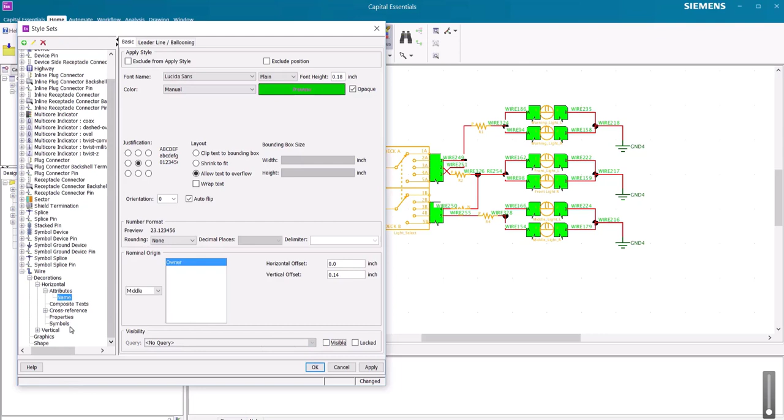We can do this via the Style Sets command dialog. And that will allow us to update the look and feel of our diagrams without changing any of the connectivity or needing to recreate anything. First, we will disable the names of our wires that are currently just cluttering up our design. We'll also set the colors of our wires back to default. We'll make our devices black, and then we'll set our connectors to a custom color.

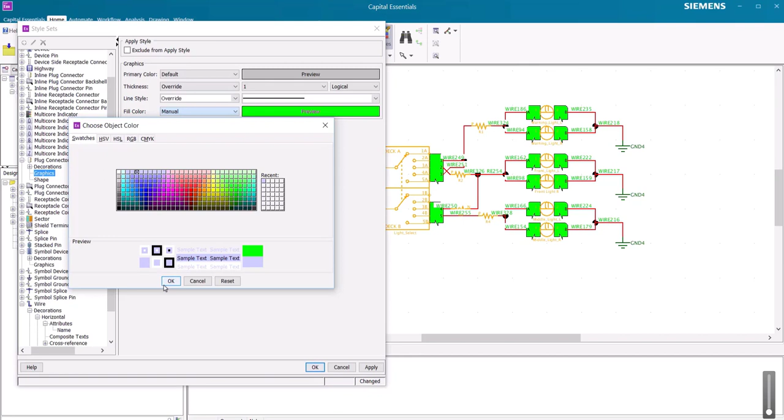Once we are satisfied with our selections, we can then apply the style sets across the diagram, all in one go. Making things a little easier on our eyes, that's for sure. Next, we'll create the circuitry for our new brake light system. Since it's similar to the other lights in our system we already have pre-configured here, we'll go ahead and just reuse this data to speed up the design process.

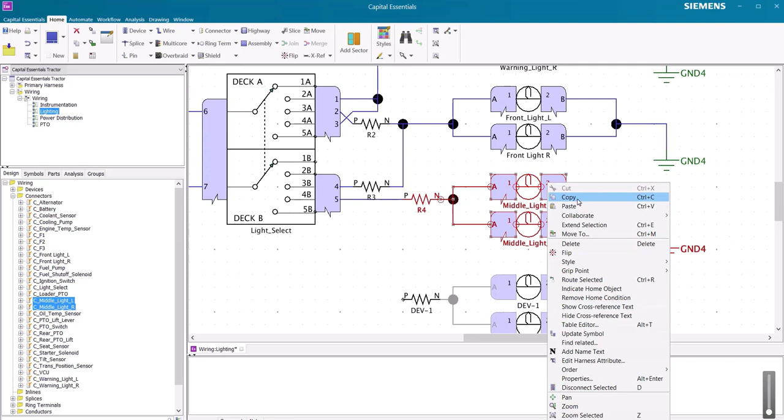By copying elements, we bring over the library part assignments, as well as any properties that may have been assigned. Again, saving us valuable design time. Now all we need to do is add another additional switch as our brake lights are independent of the light select.

We'll go ahead and add a few wires to connect the switch to the system. And then next we'll want to go ahead and rename our devices and connectors by giving them more meaningful names. We'll go ahead and start with the resistor, and we'll call this R5. We'll also update its value, which comes into play when running the analysis.

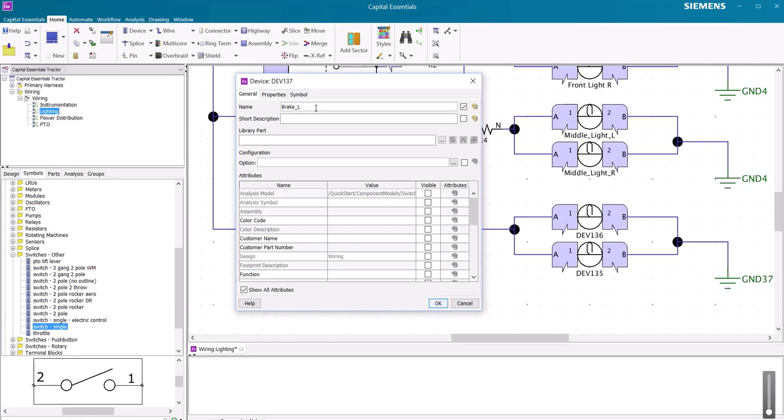For our switch, we'll call it brake light switch. And we'll also assign a library part. By doing this, we can utilize some automation to generate the appropriate harness connectors for this device. So now that that part is assigned, we can then use the generate harness connectors command to automatically create the appropriate connections.

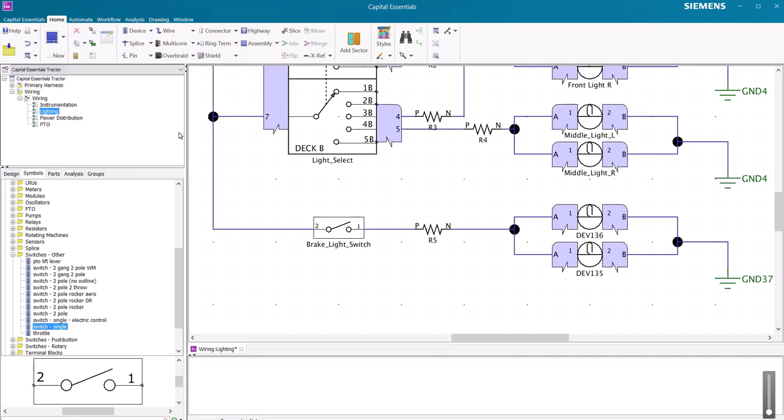If we go back and look at this in our library part assignment really quick, we can see that there's an additional part number assigned for its connectors. So by running the generate harness connectors, not only did the connectors get generated on the diagram, but the appropriate library part was automatically assigned. This helps cut down on the human error and speed up the design process.

While we're at it, we'll go ahead and rename the connectors, making them a little easier to pass over to the harness. And next, we'll update the names of our left and right brake lights. As you can see, we can do that right here in the graphical window without going to the properties, as well as our connectors.

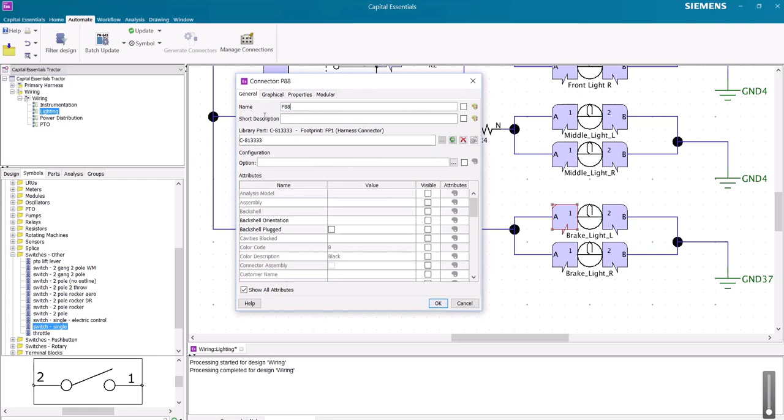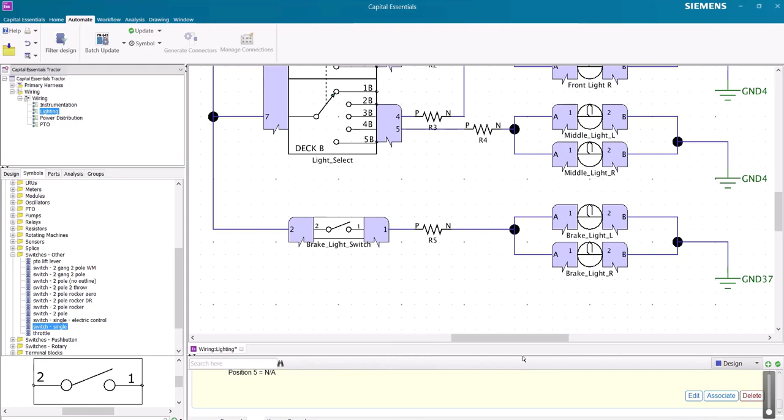Forgive my spelling. And for position 4, our front and middle lights should be powered. And then for position 5, we'll just leave this N/A for now. We can then associate all the relative objects to this note, so it's easier to locate in the design. Now we can select the lights controlled by the light select switch, the light select switch itself, and the diagram that it's associated to.

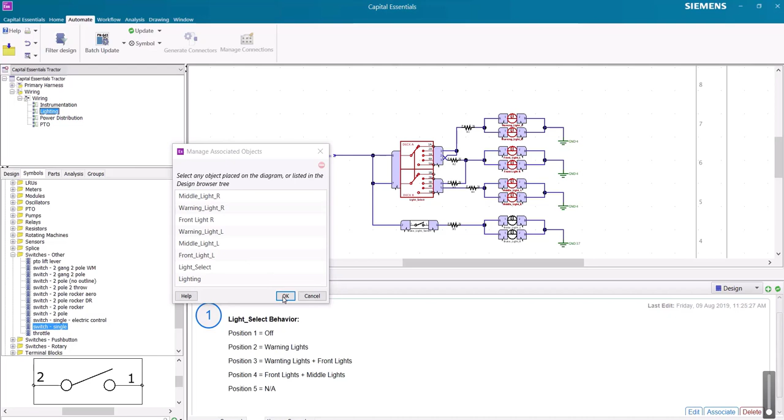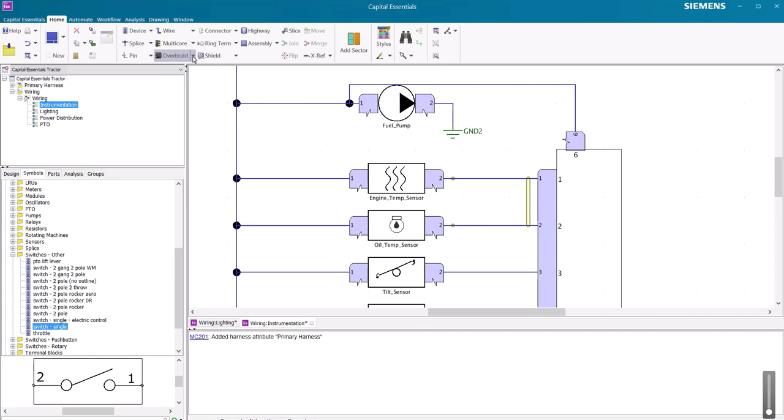Next, we'll make one final update. We will add the multi-core and an overbraid to our instrumentation diagram. We can do this very quickly via the quick actions, which use a default multi-core and overbraid definition that allows some simplification to adding them to the design. With those in place, now we'll go ahead and pass it off to the team member to perform a quick analysis on our system for verification that the design functions as intended.

So in this portion of the demo, we touched on a few of the features that help boost your productivity. Style sets enable you to quickly update the graphical representation of your designs to meet the corporate or custom standards you may have. Generate harness connectors make connector assignments significantly faster and less error prone by utilizing your parts library. Then the quick add actions simplify the multi-core and overbraid creations.

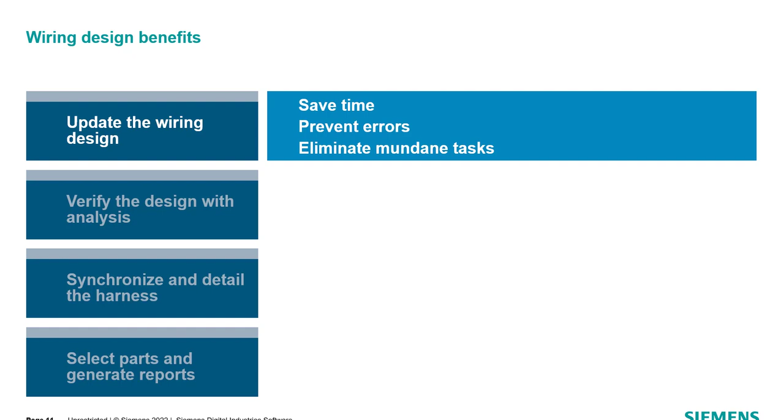Now that the wiring design has been updated, we need to perform analysis to verify the lighting circuit is behaving as intended. We will assume the role of a team member rather than the original designer to utilize some of the collaborative functionality as well. First, we will use qualitative analysis to find our connectivity issues, and then record the issues via comments for the original designer to correct. Then we'll perform a numerical analysis and correct any additional issues that we may find.

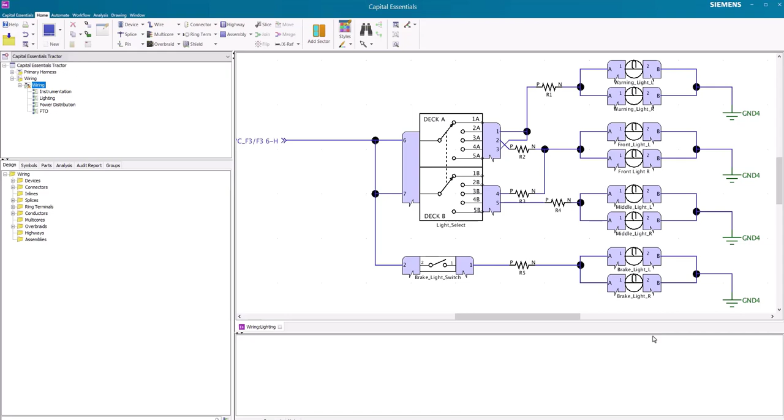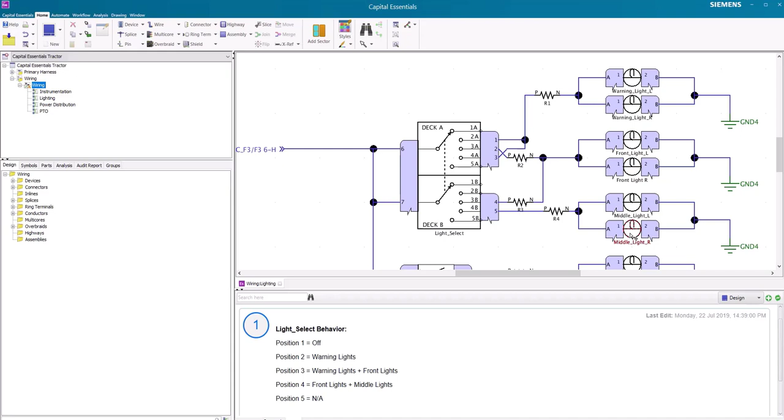Back in our lighting diagram, the first thing we'll need to do is open up the note that the designer left for us, looking for the behavior that we are looking to verify. For our light select switch, position 1 should have all of our powered lights off. For position 2, only warning lights should be powered. Position 3, only warning lights and front lights should be powered. Position 4, only front and middle lights should be powered. And in our case, position 5, not being used.

We can use the associated objects to better understand which elements are associated to the list for instruction. This helps us verify the items to be validated using analysis. Once we've confirmed our information, we can start our analysis via the Analysis tab.

The color of the diagram will update to show any issues with the design, as well as the flow of the current direction. In this case, it's cyan to tell us that the design has no current flow for the particular diagram. Since both of our switches are in the open position and no path to ground, that's to be expected. We can control the switch position via the Analysis tab, as you see here.

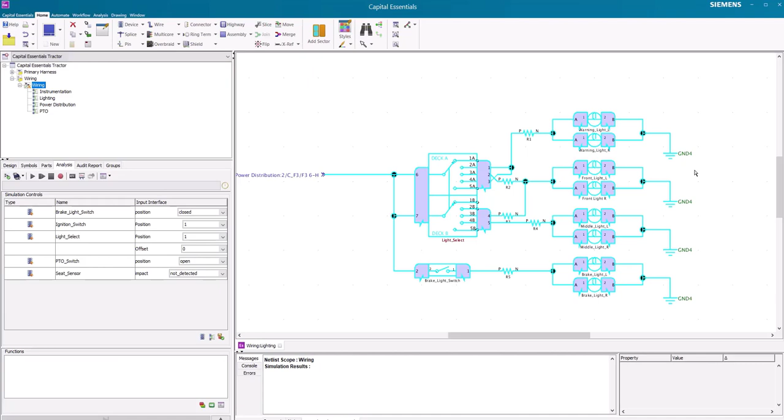First, we will try to close the brake light switch positions or change them to closed. It appears we're still not getting any current. So next, we'll cycle through the light select positions to see if we get any power. Still no power. So this could indicate that there's a problem with the design, but I think we can dig a little deeper.

So here we can see there's a power distribution cross-reference. We can quickly jump into the cross-reference to take us back into that diagram. Here we can see that we do have power in our design, as indicated by the green flow lines, and also including the arrow directions. It appears we are losing connectivity at the ignition switch.

In addition to changing positions of components in the Analysis tab, we can also do so by hovering over the switch in the design itself to display the inputs. Our ignition switch is set to position 1, or open. This might be why we aren't getting power to our lighting system.

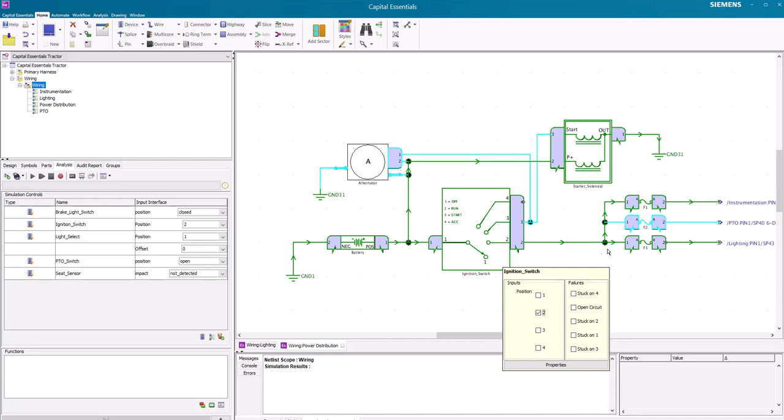If we close the switch, the analysis will update automatically in real time to show us the changes to our design. Once we change to green, here we can see that we now have current going into our lighting diagram. So now if we switch back over to our lighting diagram, we can see that we now have current flowing. Now that we have confirmed our system is capable of receiving power, we can continue on with our simulation.

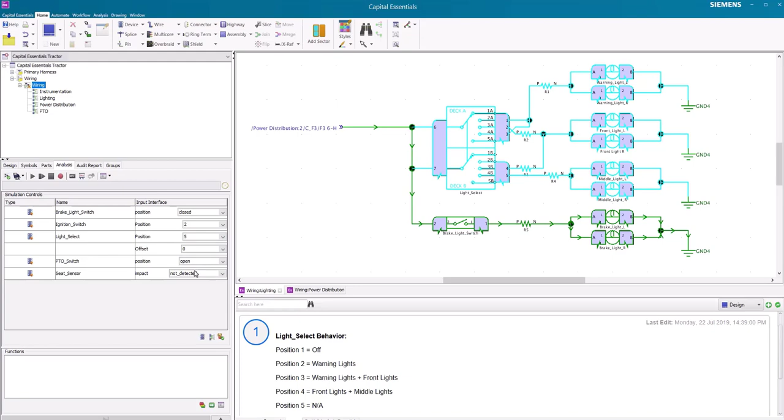Looking back at our light select behavior note left by our designer, we can cycle through our power switch positions to confirm they are working as intended. Position 2 only indicates warning lights as it's green. Position 3 looks like we might have our first issue. Our warning lights aren't receiving any power. So position 4, 5, looks like nothing is powered as it should be.

So let's go ahead and take a closer look at position 3 and 4 to see if we can figure out what the issue might be. So at a closer look, we can see that position 3A of our switch goes to our front lights, and position 3B also going to our front lights. So it appears we have no connection to our warning lights as intended by the designer. So this particular state can't be satisfied.

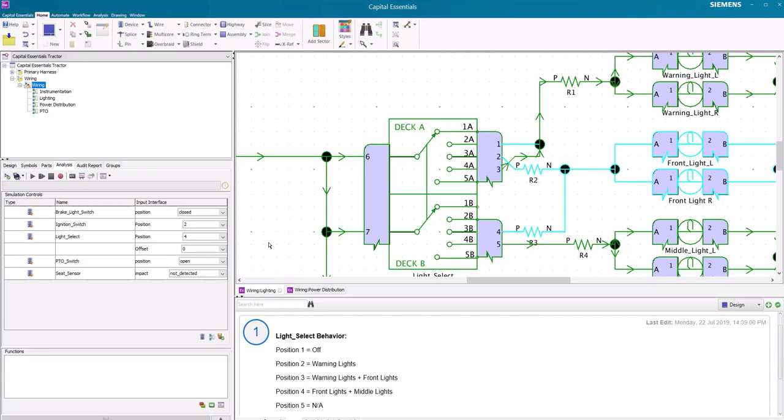Looking at position 4, connection 4B is going to our middle lights as intended, and then position 4A is going to our warning lights. So it looks like this particular wire should be going to our front lights. So I think our overall situation is that we have two wires going to the wrong connection points. To fix this, in this case, we can just swap the two wires.

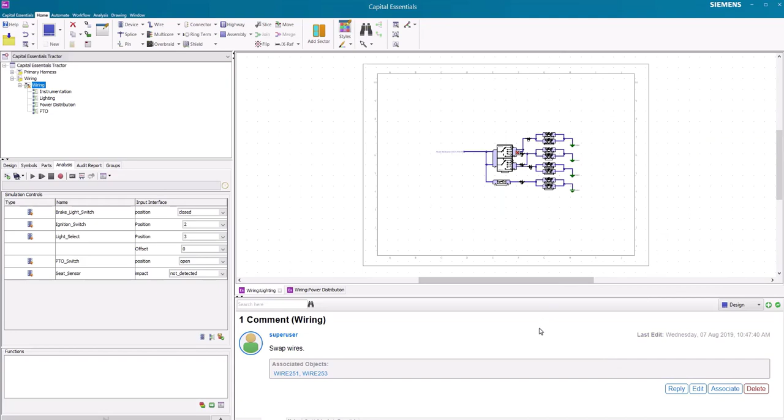So we'll go ahead and leave a quick note for the designer. And we'll go ahead and associate the two lines that we're referring to. At this point, we will reassume the role as the engineer. Let's review the comment that the analyst left for us. Here we can select the associated objects left in the comments to quickly locate the items in question.

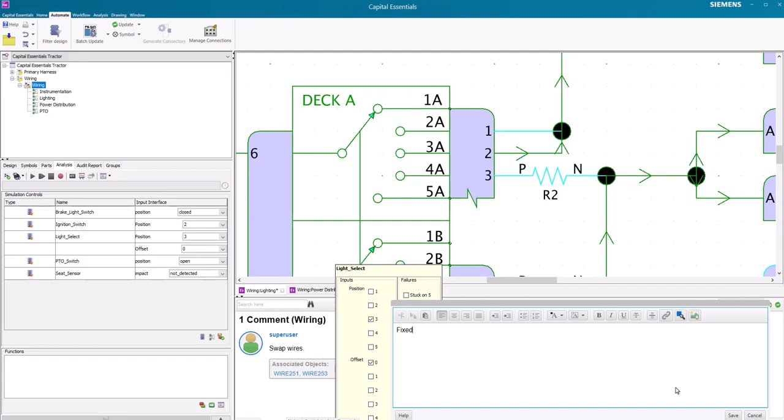This is an easy fix using the Manage Connections command. Locating the wires in question, we can quickly swap the connections. And just like that, the analysis updates and confirms that we now have connections as intended. Let's leave a comment back to our analyst that the design has been updated and the issue is resolved.

This created a digital thread of communication across teams for future reference. A thread that might easily get overlooked or missed in the common email communications. Now that our issues are fixed, we can continue our analysis for the rest of the system. Let's quickly cycle through our switch positions to confirm all positions are operating as intended.

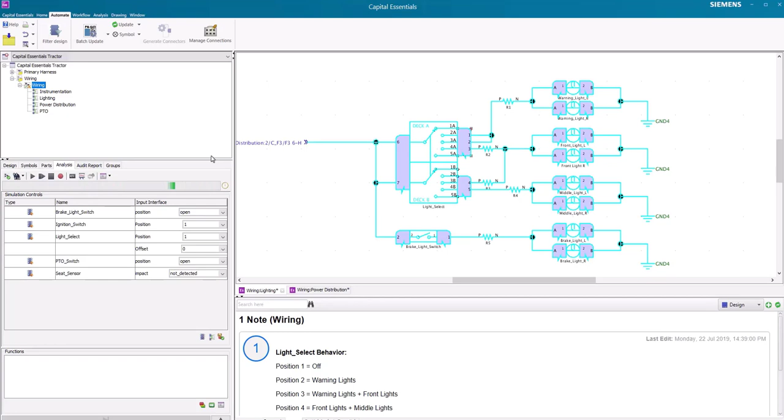We'll go ahead and stop this simulation, and now we'll go ahead and select the numeric simulation. This analysis type takes into account wire cross-sectional area and resistance. So it provides some additional level of detail that qualitative doesn't. So for example, if we hover over a wire, we now get a pop-up with additional information, such as the rated max amperage, current, voltage, and resistance values.

Depending on the element that we hover over, we are presented with relevant information. The brake light lamp even shows a lit condition, as we can see here as yes. So not only does it tell us that we have power, but if we have enough power for it to function correctly. So now we can pass through our lights in our system to verify proper connectivity.

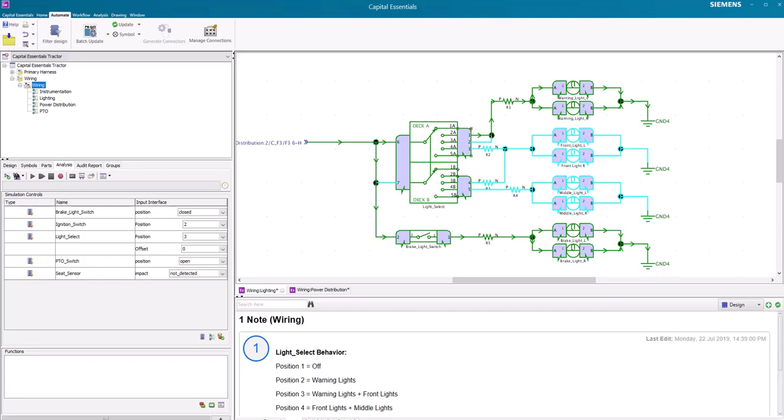Everything seems to be lit. So for position 3, we can see our lights maybe are not meeting our proper voltage. When we hover over, we can see that the lit condition is not being met. If we look at our analysis output window, we can see that we actually have a blown fuse.

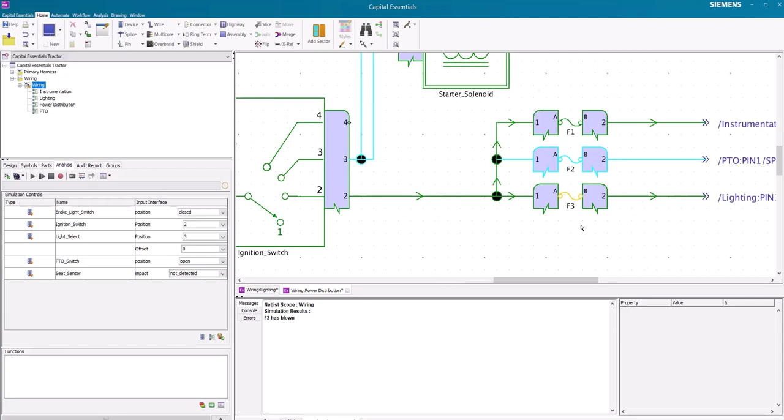Let's jump back into our power distribution diagram. We can now see that we have a yellow indicator for our fuse symbol, which indicates failure. If we hover over the fuse, we can see that there is a 10 amp fuse configured. We can also see at the bottom the suggested rating should be 25 amp. We will assume we know all 3 of these fuses should be a 30 amp fuse. So we can quickly change the associated part number to this fuse to change to a 30 amp fuse.

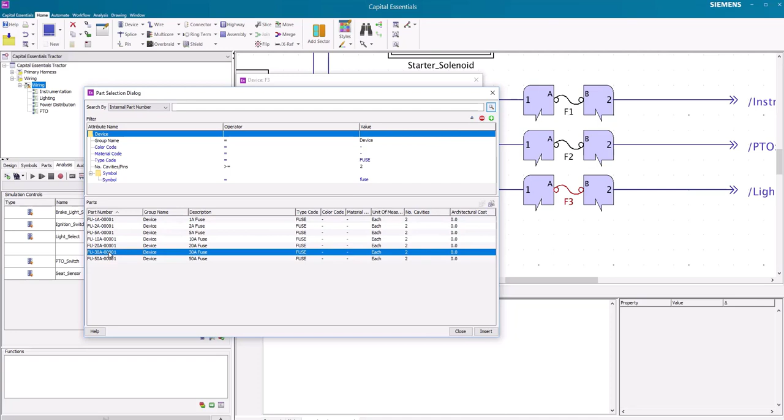We'll go ahead and filter by fuse, and we'll select our 30 amp fuse from our parts list. Now that it's been updated, we can see that our fuse blown warning is gone and the color has changed from yellow to green. Let's go ahead and jump back over into our lighting diagram again. Hover over, and now we can see that the lit condition is now being met for all of our lights.

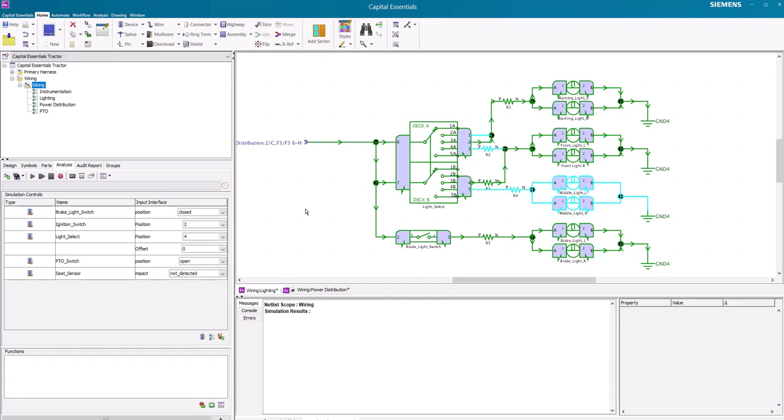Let's look at position 4. We will review our last position to validate that all of our lights in this position are working properly as well, but it looks like we might have a potential issue with one of our wires. This cyan color doesn't necessarily indicate a failure, but what it does tell us is that the current of a particular wire is over its rated value and approaching its maximum rating. So in this case, we will up the wire spec that can handle that current.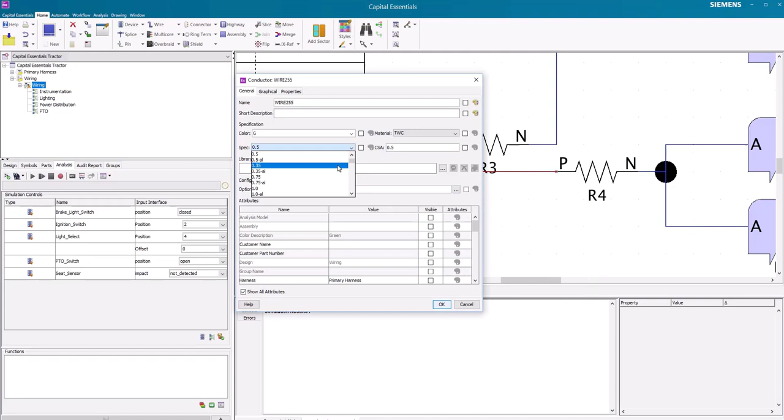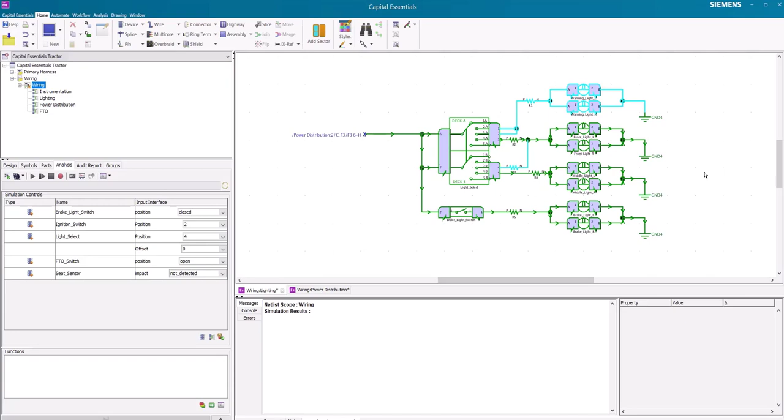Once the simulation reruns, we can see that the magenta color is gone and replaced with the green flow indication, and we can also see the current is within the rated value. At this point, we have finished our analysis for our wiring diagram and are ready to pass it off to the harness team for synchronization.

In this portion of the demo, we demonstrated how analysis can be used to achieve better insight into a circuit's behavior. Analysis also enables you to find and fix issues early in the design process, avoiding propagating design errors downstream, where they become much more difficult to detect and significantly more costly to correct.

We also highlighted some of the collaboration functionality via comments and notes, which is valuable in supporting team-based design environments, allowing you to document important design information within the tool itself. So it's easier to keep track, and enables you to utilize the information interactively via cross-probing to make communication much clearer.

To propagate our changes that we made to our wiring design to the harness design, we'll need to synchronize the two. First, we will update some of the attributes for our new content we added to prepare it for synchronization. Then we'll move the newly added content to correct the locations on the harness and make any minor changes to the topology. Finally, we'll update our tables to display the additional information that we recently added.

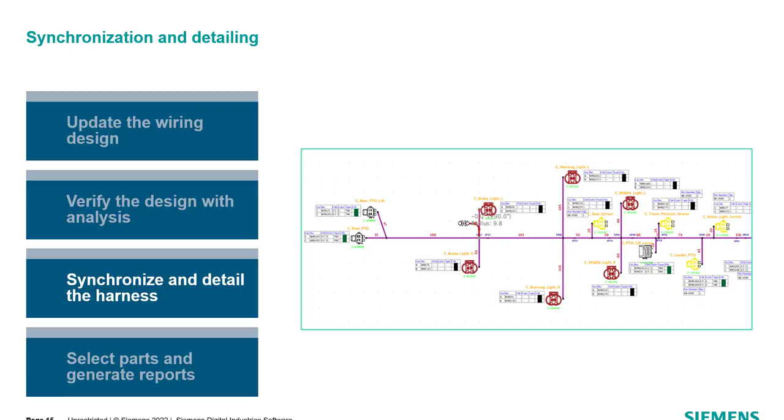First, we'll open up our wiring harness design. Here we can see that a majority of our connectors have already been placed, coming from a previous synchronization run, but now we need to synchronize again to bring in our recent changes that we made to our wiring design. Notice our naming of the primary harness — this will come into play here in the next few steps.

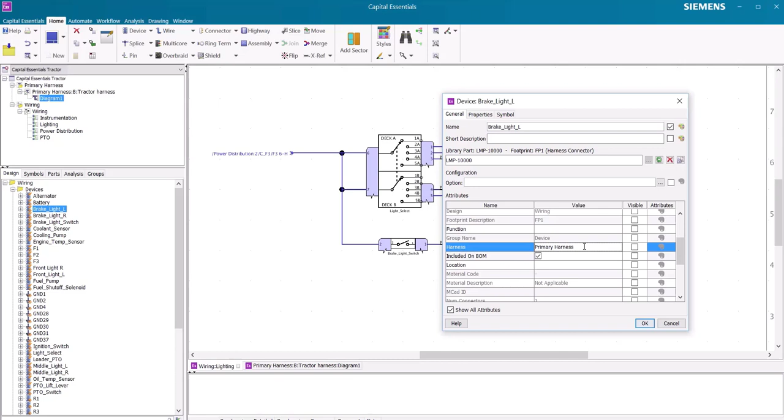There is one last thing we need to do before performing our synchronization: we need to assign the harness attribute. If we look at the brake lights, we see that they already have the harness attribute set to the value of primary harness. That's because we copied them from the middle lights, which were already part of our harness, which means that all we need to do is add this content to the elements that were outside of the copy-paste function.

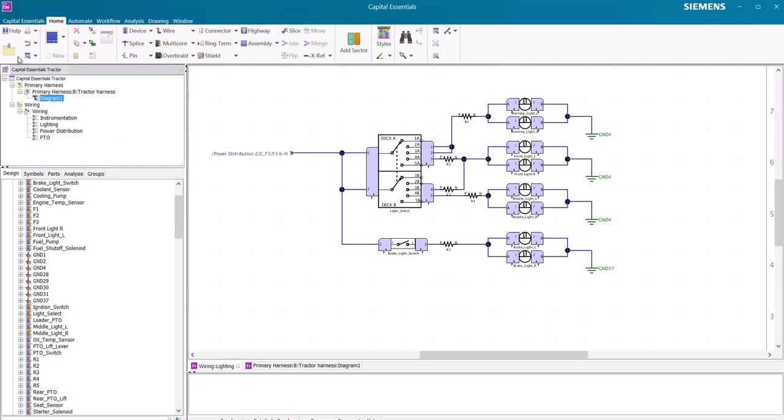We'll start by adding it to the wires, and then the brake light switch connectors and the brake light switch itself. A quick save and close, and now we're ready to synchronize.

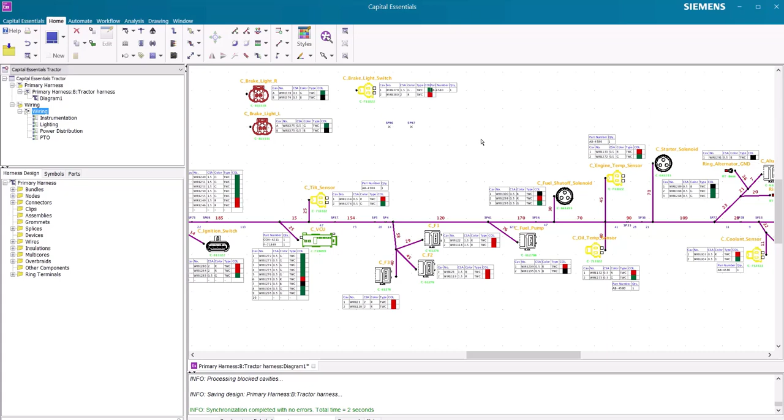Upon synchronization, we can see that our newly added connectors for our brake lights, as well as our brake light switch, along with a few splices. The next step is to add these components to their appropriate locations on the harness. We can simply do that by moving them.

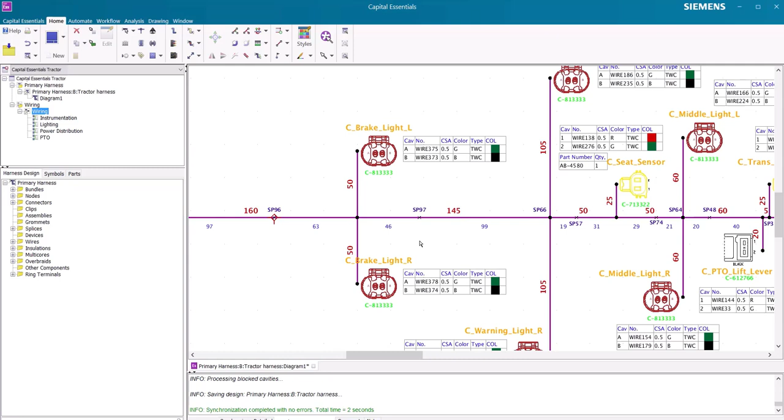Over a particular bundle, using the quick access grab handles, we'll go ahead and add a bend to our brake light bundle and reposition them a little further down the harness. We'll go ahead and do that for the other side as well. Quick and easy.

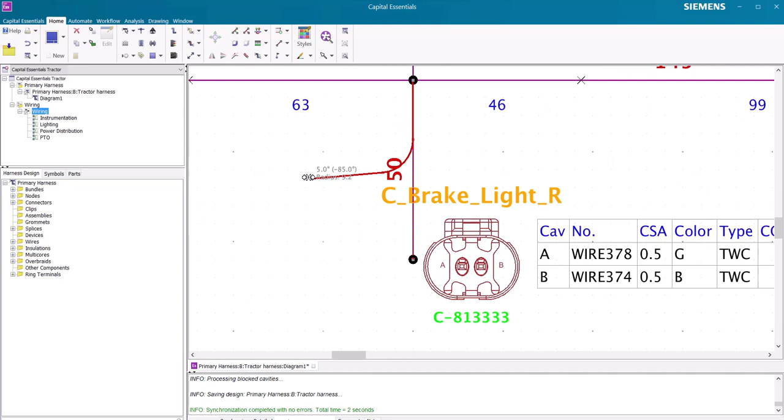We'll go ahead and apply the style, and then the connectors will automatically reorientate for us.

So next we'll take a look at the tables in our design. At the top here, we have a simple from-to wire connectivity table that automatically updates as we perform synchronization. So here we can see our newly added connectors for our brake lights, the switches, the splices, even the multi-cores that were performed before synchronization.

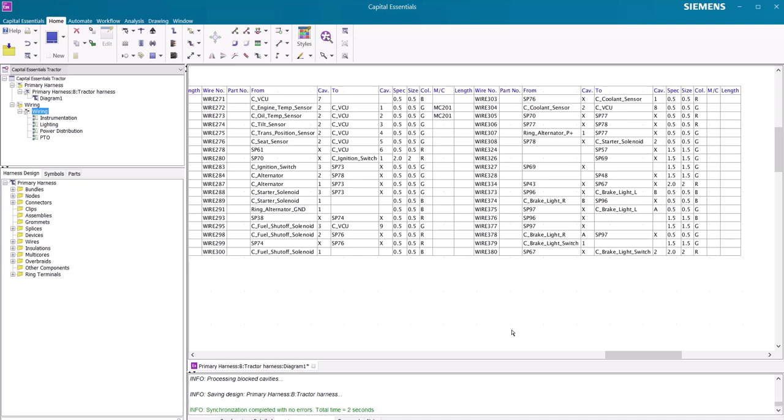Over to the left of our diagram, we have a table listing all of our connectors contained in our harness. And then we have these individual wire tables for each one of the connectors as well. All of these tables are configured in terms of what information we want to show and how they appear. This is all controlled via the styling.

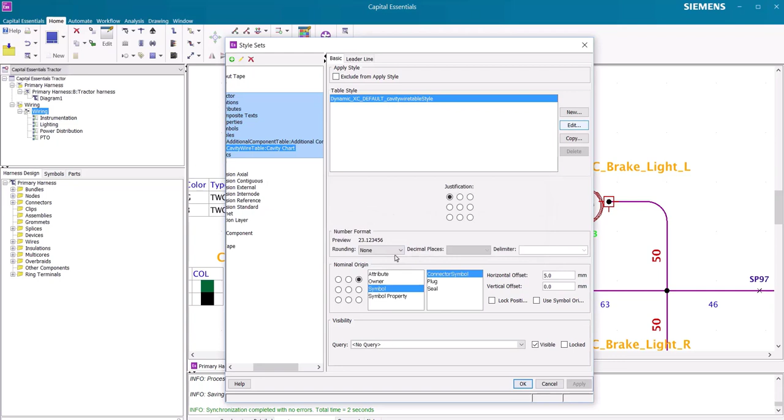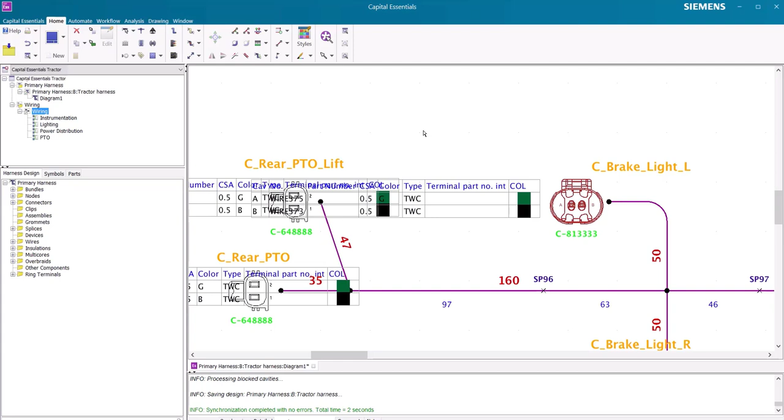We'll make a quick adjustment to the columns of our wire tables. We'll turn on wire part numbers, as well as the terminal part numbers by making them visible. Upon updating, we can see our tables now reflect those changes. We can also manually adjust the placement of our information to better communicate our design intent.

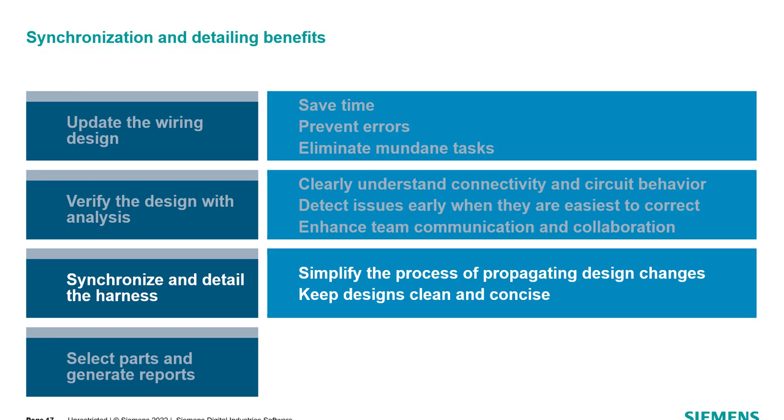In this portion of the demo, we showed how simple it is to pass changes between your wiring and harness designs to ensure that they are always in sync with each other. We also highlighted bundle manipulation via the grab handles, and then table customizations via the styling, both of which help keep your design clean and concise, giving you full control over how your harness designs are presented.

Finally, let's take a look at generating some reports for our designs.

Before we get started generating reports for our harness design, we have to select the appropriate part numbers for our wires and cavity components. This is a very quick and easy process using some automation.

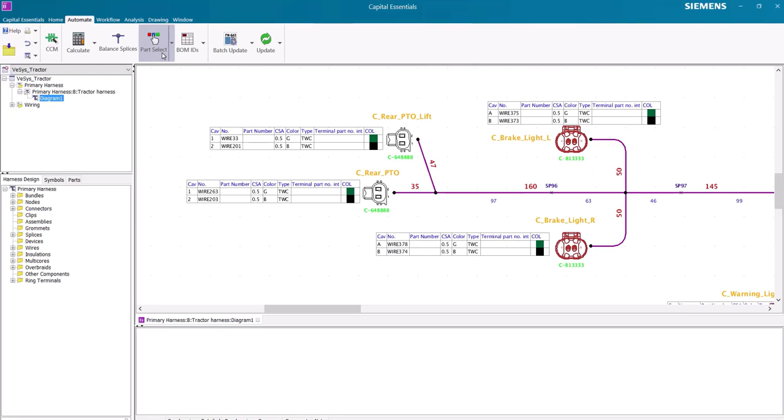One more thing we can do, for the sake of reporting, is calculating our wire lengths.

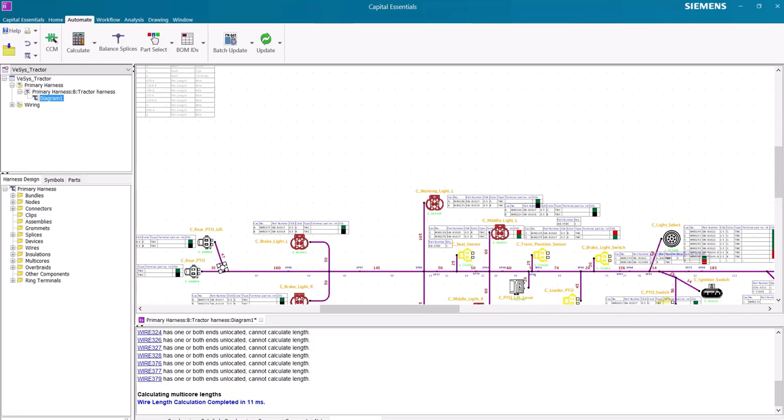We can also automate to select the appropriate cavity connectors for our part numbers. We can also use Cavity Component Manager to select the parts on a case-by-case basis for each connector. Or we can use the part select in this case to select all of them at once for every connector in the design.

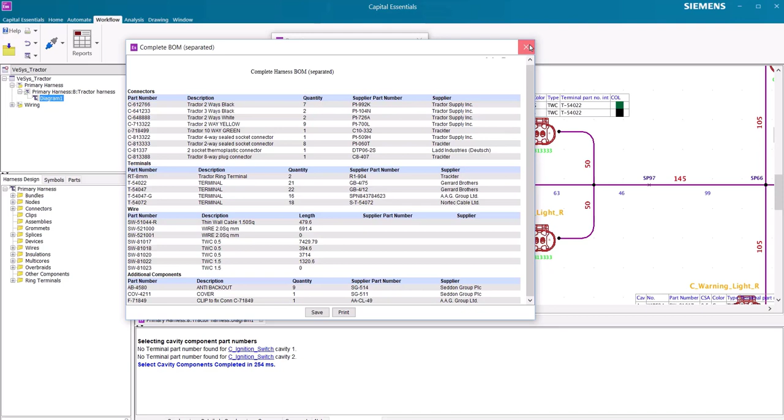With our library parts assigned, we can go ahead and select reports from the reports dropdown to start generating reports. We'll go ahead and use the pre-configured complete BOM selection. And here we can see a very detailed bill of material pulled directly from the most up-to-date data in our design. No need to organize, format, or pull any data in ourselves.

We can save these reports as HTML formats or print them for future reference. In addition to using pre-configured reports, it's also easy to create our very own custom reports as needed.

For this example, we'll go ahead and do another simple from-to report for our wires. We'll add the part name for the first column. We'll do the part number for the second, and then from and to for our last two columns.

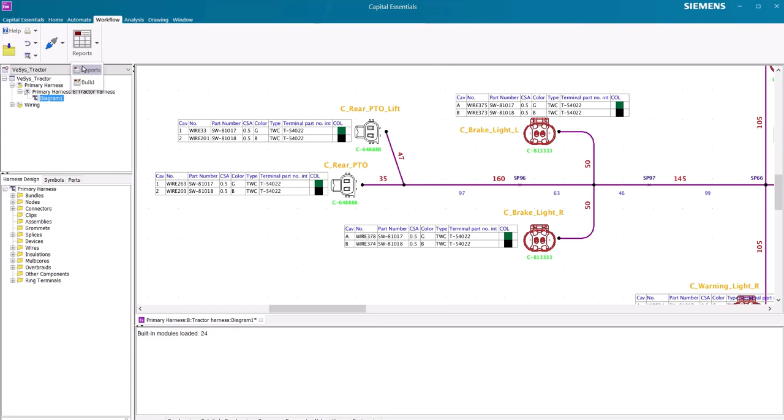So now we'll go ahead and give this report a name so it can be saved and reused for future designs. Then once that report has been saved, you can find it on the drop-down reports for easy access. There it is.

So in this portion of the demo, we showed how automation can be used to streamline part selection, saving additional time, and further reducing the risk of error. We also demonstrated how simple it is to generate reports and even customize them to meet your company's needs.

Capital Essentials provides functionality that helps engineers deliver rapid, right first time, error-free electrical and harness designs. Through automation, analysis, and a plethora of other time-saving features, it allows design teams to put their effort where it counts, in innovation.